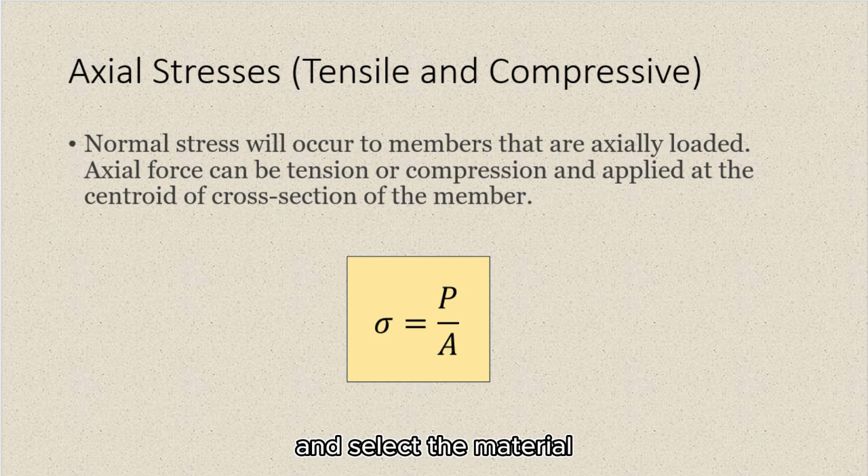You must investigate the manner in which these internal forces are distributed within the body. Only after these computations have been made can the design engineer select the proper dimensions for a member and select the material from which it should be fabricated. This is important in construction.

Up to this point, we have been concerned only with the resultant of the internal force system. However, in design, the manner in which the internal forces are distributed is equally important. This consideration leads us to introduce the force intensity at a point, called stress, which plays a central role in the design of load-bearing members.

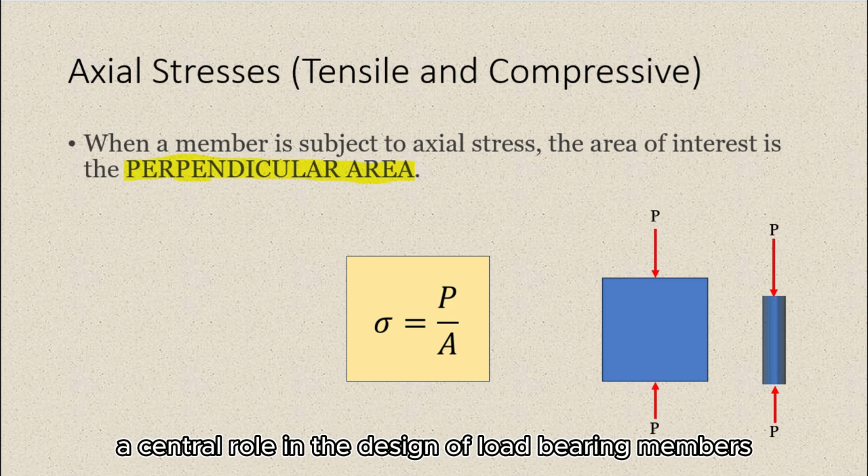In our previous subject, statics, we were able to perform the first step in the analysis of a given structure. But the values we obtain do not necessarily tell us whether the given load can be safely supported, considering the material or the type of connection.

The strength of a certain member depends upon the value found of the internal force, the cross-sectional area of the body, and the type of material of which the body is made. As such, the internal force represents the resultant of elementary forces distributed over the entire area, and the average intensity of these distributed forces is equal to the force per unit area.

Whether or not the members will break under a given loading clearly depends upon the ability of a material to withstand the corresponding value of the intensity of the distributed internal forces. Again, relating this to our formula, it depends upon the force, the cross-sectional area, and the material of the body, which will give us an idea of the allowable stress.

The force per unit area, or intensity of the forces distributed over a given section, is called the stress on that section, and it is denoted by the Greek letter sigma. The stress in a member of cross-sectional area A, subjected to an axial load P, is obtained by dividing the magnitude of the force P by the cross-sectional area A.

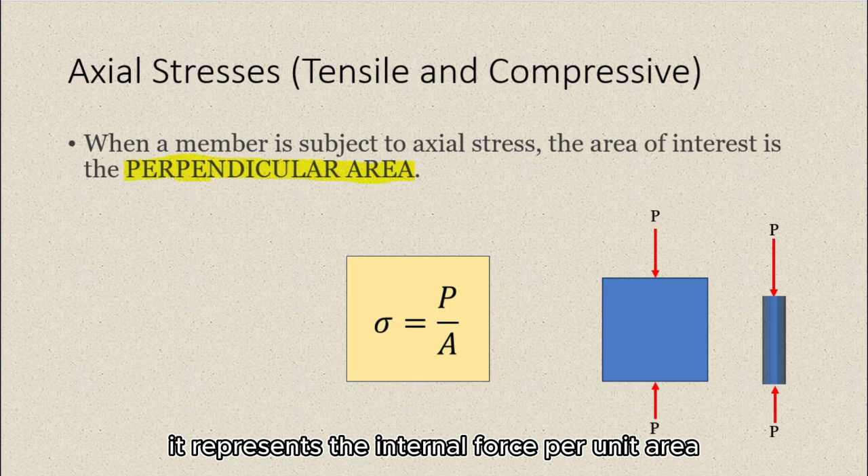This is something you always have to remember. Axial stress is a type of stress that occurs when the force is applied along the axis or length of a structural member, such as a beam, rod, or column. It represents the internal force per unit area acting on a section of the material perpendicular to the applied force.

This axial stress can be either tensile or compressive, depending on the direction of the applied force relative to the material. Recall what forces are tensile or compressive in the analysis of trusses. Tensile forces are pulling forces causing elongation, with a positive sign convention. Compressive stresses develop due to pushing forces that could cause the shortening of a member, with a negative sign convention.

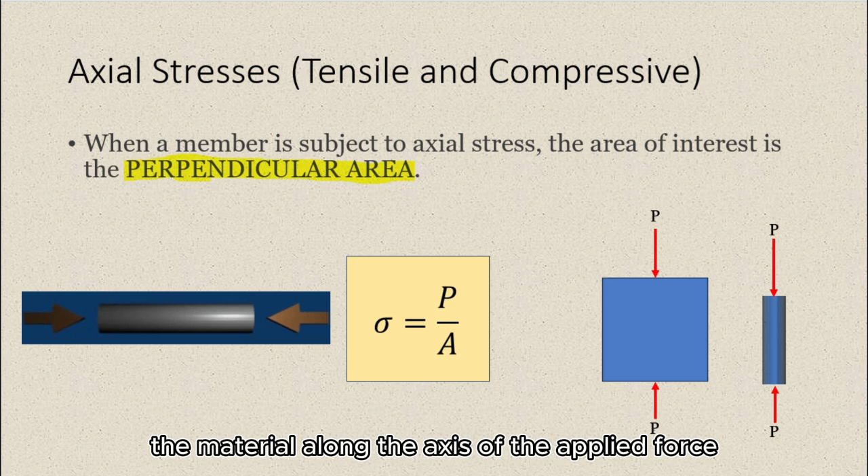This is because it tends to decrease the length of the material along the axis of the applied force. Let me reiterate, the area of interest for both of these stresses is the perpendicular area.

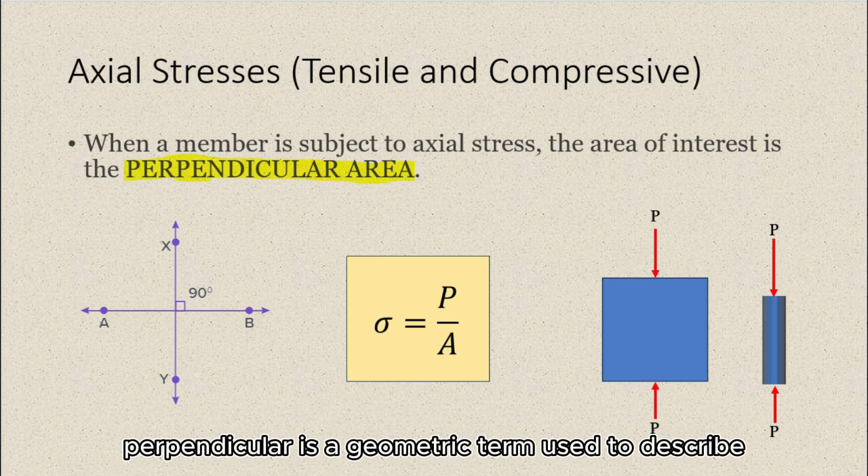Let's consider the two objects shown at the right, subjected to a force P. And then let's recall the definition of the word perpendicular. Perpendicular is a geometric term used to describe the relationship between two lines, planes, or surfaces that meet or intersect at a right angle, which is 90 degrees.

If you look at our force P, notice that it is perpendicular to this line, because we can form a 90-degree angle at their intersection. So, what this means is our perpendicular area will be these areas.

However, at first glance, we may not be able to make sense of the area that we will consider, as it is sometimes difficult to interpret the area when we are viewing the bodies on a two-dimensional plane, or 2D. But notice that the area we are considering here is the cross-sectional area.

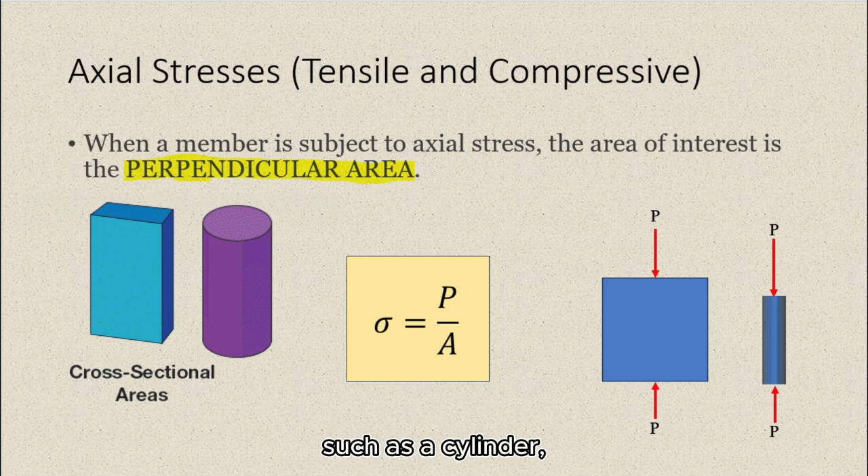The cross-sectional area refers to the area of a two-dimensional shape that results from cutting or slicing through a solid object perpendicular to its longest dimension or axis. In simpler terms, it is the area of the shape that is revealed when you make a straight cut through

an object such as a cylinder, cube, or beam at the right angle to its length. Now, if we rotate these objects, we will be able to see that area. Rotating these two, we would have this figure. For a cylindrical object, like a pipe or wire, the cross-sectional area would be a circle.

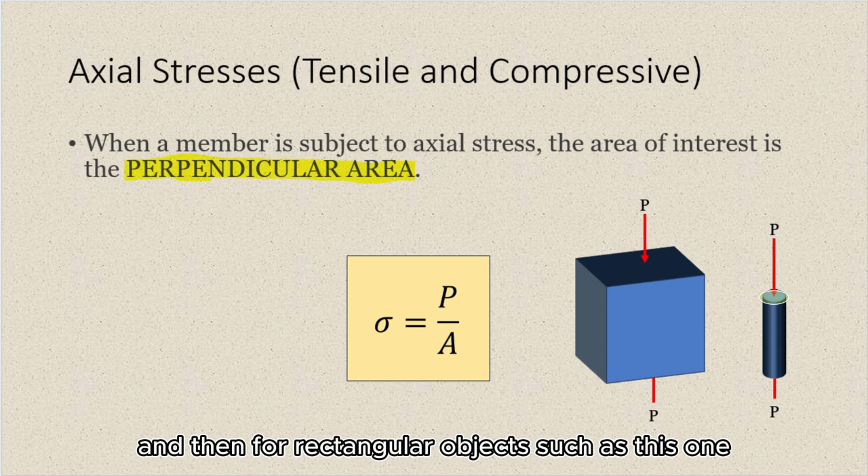And then for rectangular objects, such as this one, the cross-sectional area would be the rectangular area that you can observe that's perpendicular to the force P.

Now in some cases, our cables or rods may be inclined, but we will still consider a force perpendicular to that area, which is essentially the compressive or tensile force in the member. These forces are the resultant forces in our members, or simply the internal forces developed in our members. However, if we are to get the stress or pressure, these two terms may be interchanged.

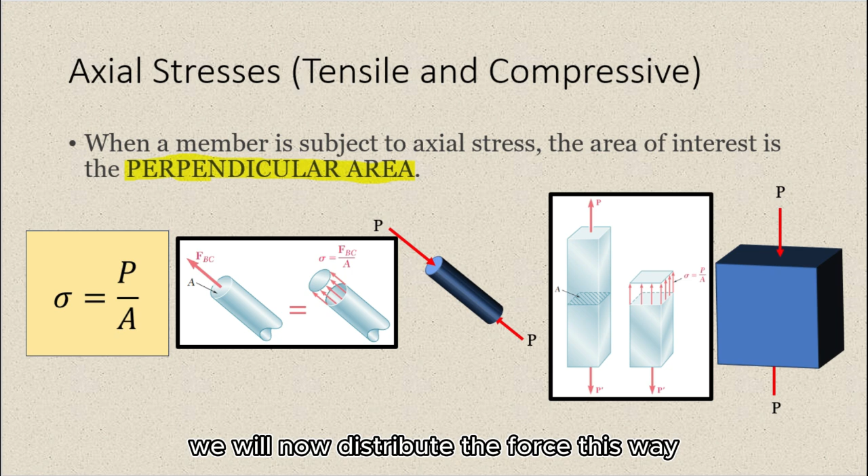We will now be distributing the resultant force P over the whole area. And so, instead of this singular force, we will now distribute the force this way. Notice that the force has been distributed throughout the cross-section.

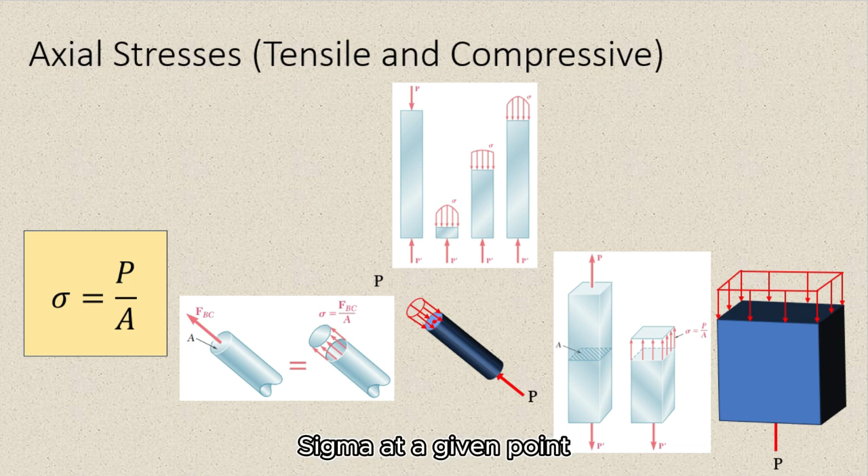In general, the value obtained for the stress sigma at a given point is different from the value of the average stress given by the formula P over A. In reality, sigma is found to vary across the section. The actual distribution of stresses in any given section is said to be statically indeterminate.

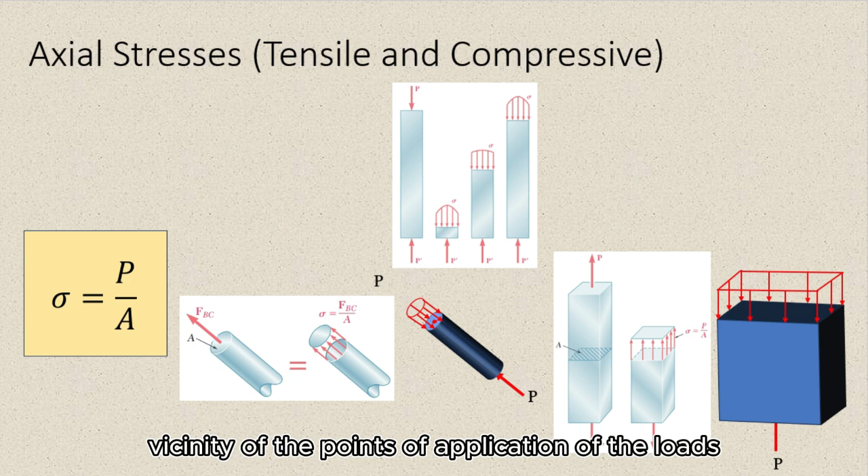However, in practice, it will be assumed that the distribution of normal stresses in an axially loaded member is uniform to simplify the calculations, except in the immediate vicinity of the points of application of the loads. So essentially, the values of the stresses are made equal to save time, and then we can obtain it from the simple formula of force divided by the area.

However, we must realize that when we assume a uniform distribution of stresses in the section, such as when we assume that the internal forces are uniformly distributed across the section, it follows from elementary statics that the resultant P of the internal forces must be applied at the centroid C of the section, which is for the rod at the center of the circle, while for the cube, it's at the center, since the figure is just symmetrical.

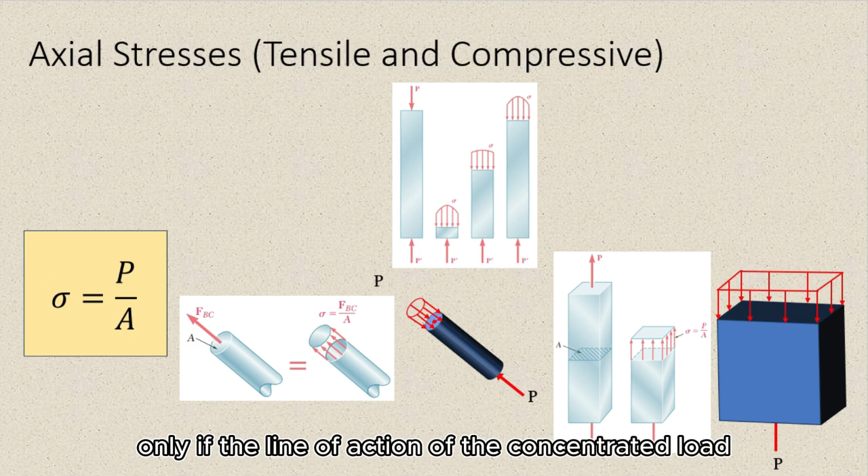This means that a uniform distribution of stress is possible only if the line of action of the concentrated load passes through the center of the section considered.

Now, since SI metric units are used in this discussion, with P expressed in newtons and A in square meters, the stress sigma will be expressed in Newton per meter squared. This unit is called a Pascal.

Now let's write that here. 1 Pascal is equivalent to Newton per meter squared. And so, if we have kPa, that will just be kN per meter squared. And then if we have MPa, that will be meganewton per meter squared. And then if we have GPa, that will be giganewton per meter squared.

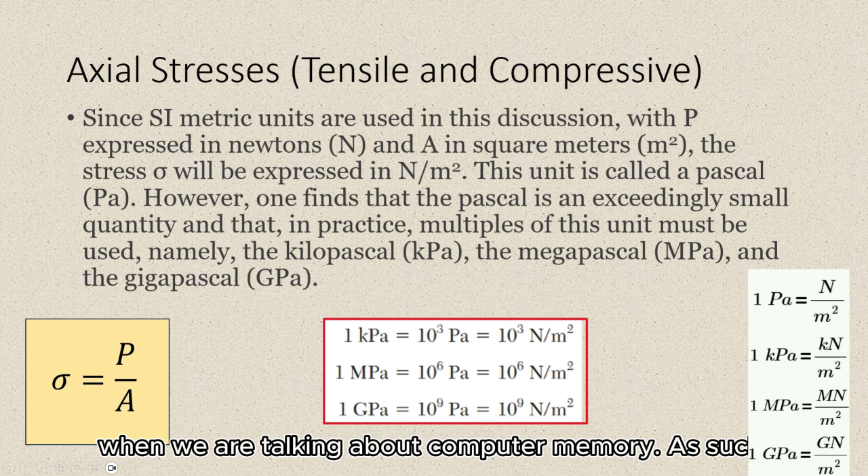So this is just like kilobytes, megabytes, and gigabytes when we are talking about computer memory. As such, 1 kPa is equal to 1000 pascals, just like 1000 bytes is equal to 1 kilobyte, and then 1 MPa is equal to 1000 kilopascals, since there are 1000 thousands in a million, and then 1 GPa is equal to 1000 MPa. This will be our conversion.

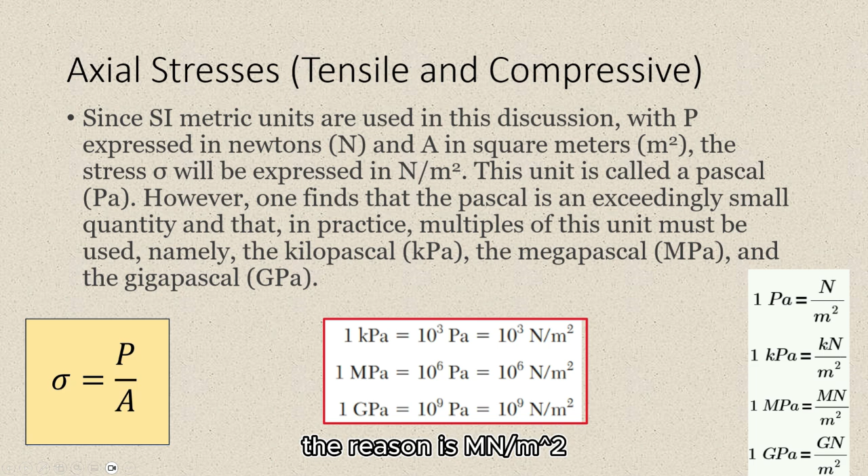Now, in our usual calculations, we will be using the MPa unit. This is because our cross-sections are usually small and have dimensions in millimeters. Now, you might wonder, MPa is meganewtons per meter squared. Why is it generally applied? The reason is meganewton per meter squared actually just means Newton per millimeter squared.

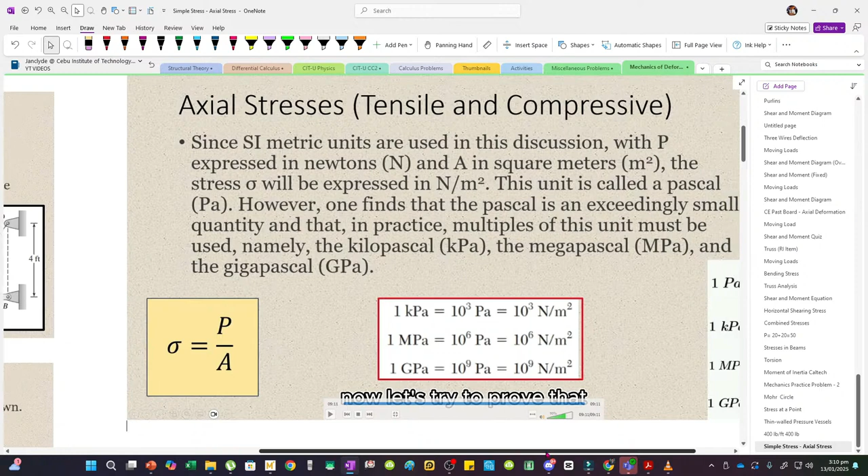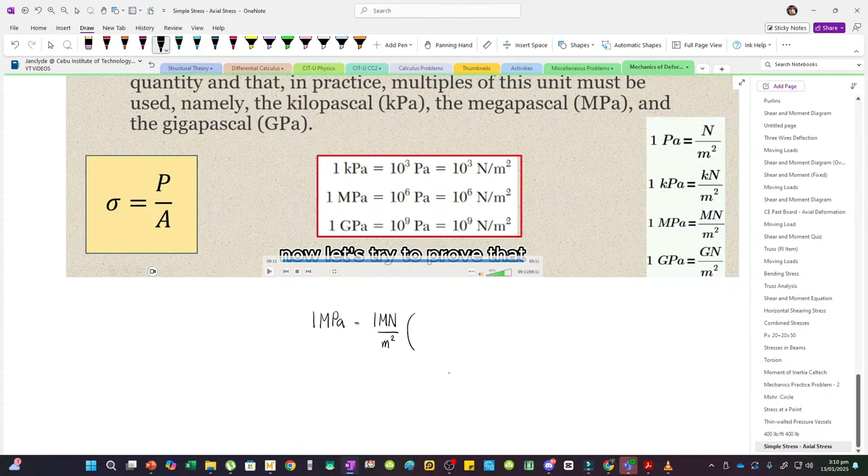Now, what if I want to convert this into Newton per millimeter squared? We can convert meganewtons. We have, for 1 meganewton, essentially, 1 meganewton is equal to 1000 kilonewtons. And then 1000 kN naman...

1 kilonewton is equal to 1000 newtons. So converting MN to newtons, we would first convert into kN. So this is like our conversion factor. We have 1 MN, and to cancel the units, we have 1000 kilonewtons. Then converting kilonewtons to newtons, we can multiply by this factor.

1000 newtons should be on top so that the kilonewtons cancel. So this is divided by 1 kN, and the kN cancels out.

And then the m squared, we can also convert that. Our conversion factor is this: for m squared, we know that 1 meter is equal to 1000 mm. But since the meter there is squared, we also need to square the conversion. So it's 1000 times 1000, that's 1000 squared, and the one at the bottom is also 1000 squared. So essentially, everything cancels out.

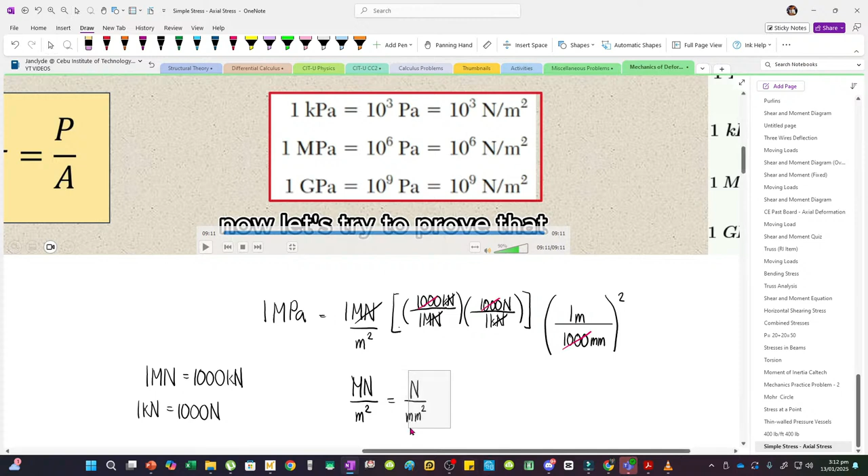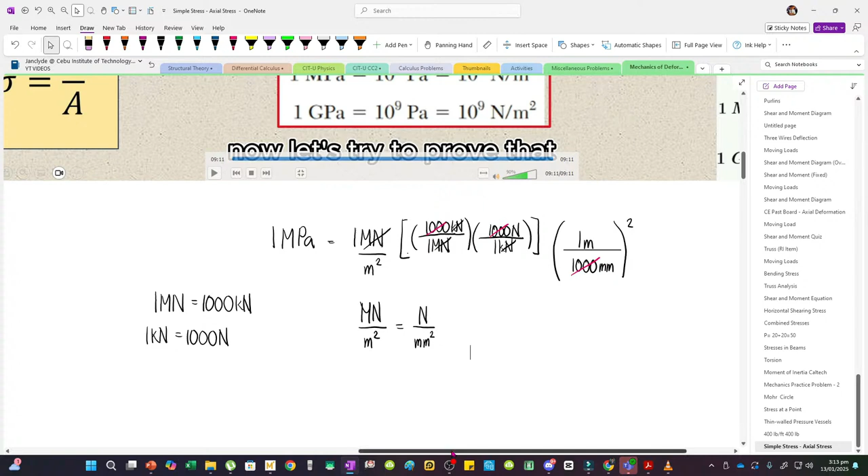So that's why usually what you see in stress values is in MPa. It just means Newton per mm squared, which is usually what's used since our sections are essentially dimensioned in millimeters. It would be too large if in meters, unless we are talking about beams or columns, or slabs too.

So this is our first question. A hollow steel tube with an inside diameter of 100 mm must carry a tensile load of 400 kilonewtons. We have two questions since I added some from the previous lecture. Our first question is to determine the outside diameter of the tube if the maximum working stress or yield stress of the material is 120 meganewton per m squared, which is just equal to Newton per mm squared based on our conversion.

Our dimensions are in mm since the inside diameter is 100 mm. So for the first question, determine the outside diameter. We know the general formula: stress equals force divided by area. So for letter A, stress is 120, which is the maximum working stress or yield stress.

So for letter A, that's 120 Newton per mm squared. Let's just convert the units, and that equals force divided by area. Now this is our force. The perpendicular area is this hollow portion, like a hollow section, so we have to use that area for P over A. Now our P is 400 kilonewtons, the axial force applied, which is essentially a tensile force since it's a pulling force.

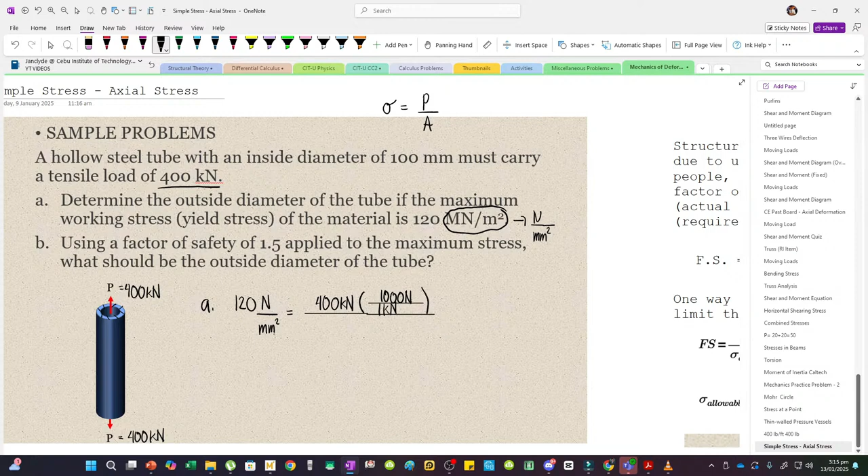We have 400 kilonewtons. But all our units need to be consistent. Since it's in Newton per mm squared, the unit of force must be in newtons, and the dimensional unit for distance must be in mm. So the 400 kilonewtons needs to be converted into newtons. Again, 1 kN is equal to 1000 newtons. Whatever you want to cancel, you put in the denominator, so the kilonewtons cancel out and what's left is newtons.

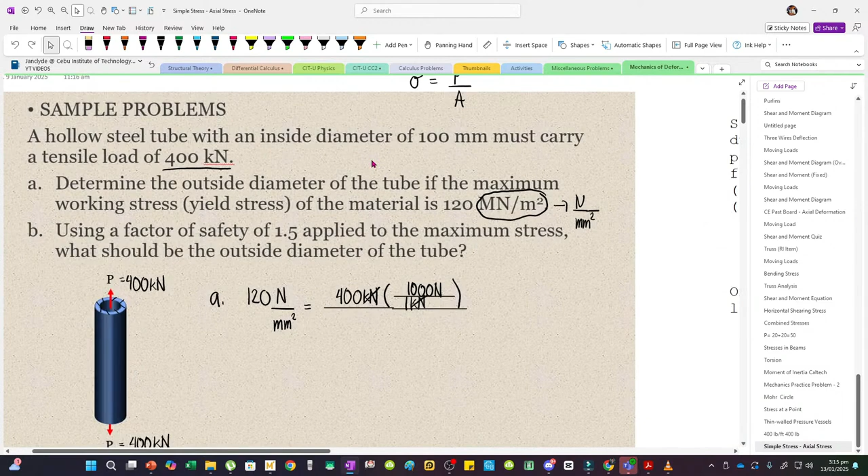And then for the area, we have a hollow section. The inside diameter is 100 mm, this dimension right here. Now the area of that hollow section can be taken by taking the area of the outside circle minus the inside circle. So the area of the outside circle, that's pi d squared divided by 4 in terms of the diameter.

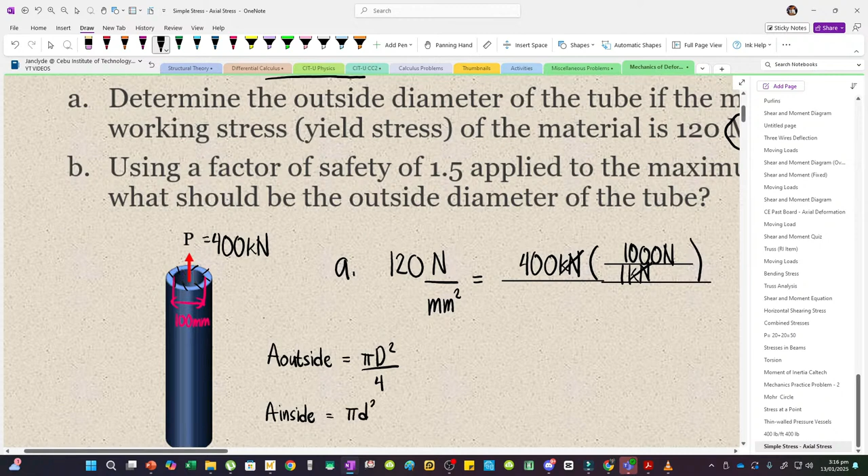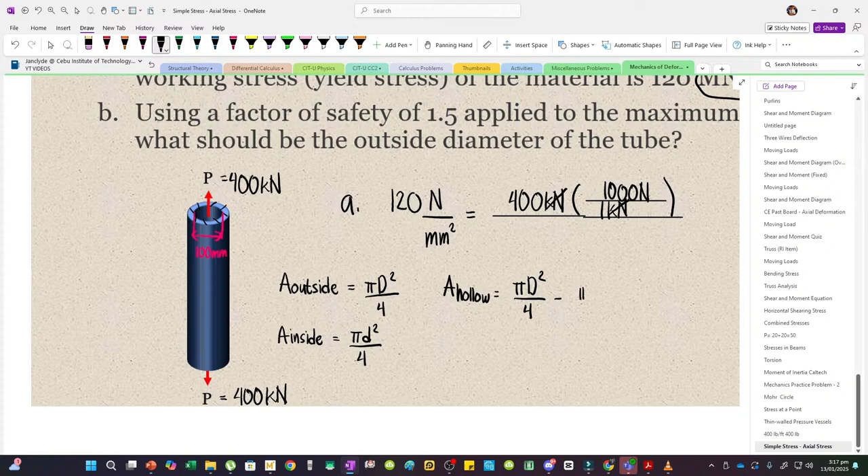Since it's the outside diameter, we use capital D. And then the area inside, this inside circle, is equal to pi times d squared divided by 4, small letter d for the inside diameter. So the area of the hollow section would be the area of the outside circle, pi D squared divided by 4, minus... what is d? It's given, d is equal to 100 mm for the inside diameter.

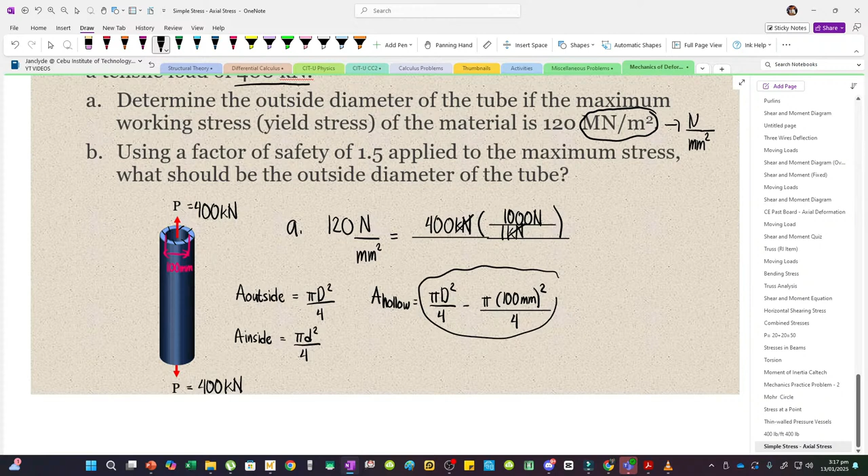So pi times 100 mm, squared, divided by 4. This is the area we'll place in force over area, so let me copy this down. We divide by this amount. So solving for D, it's a bit hard to simplify, but to solve many problems, I will just use my emulator. But you can simplify it on your own terms.

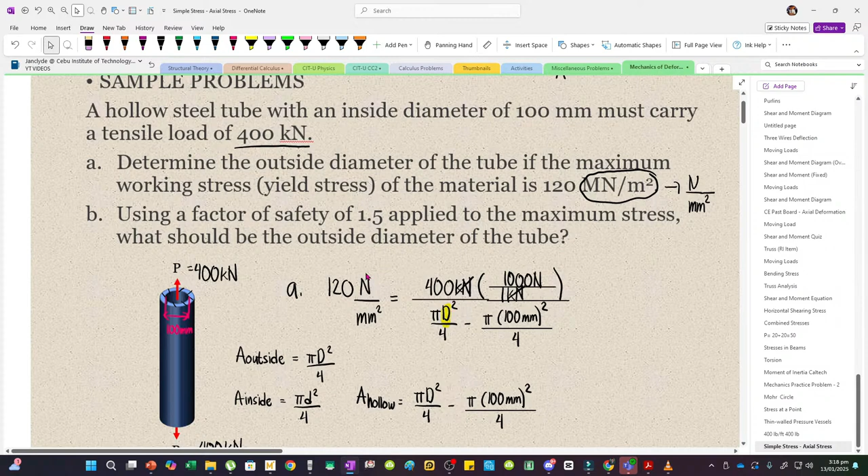So equate ko na lang yan. Notice na matagal mag-solve yung calculator kapag yung unknown is nasa denominator. Diba, nasa denominator yan. So yung pwede mong gawin is you can just multiply this term sa kabilang side. So essentially, yung ita-type mo sa calculator is 120 multiplied by this denominator.

So we have pi times unknown yung diameter natin, so lagyan mo ng x, divided by 4, minus pi times 100 squared, divided by 4. Ayan. And then equate natin to 400 multiplied by 1000.

Mas mabilis yung processing ng calculator kapag lahat ng unknowns mo nasa numerator lang. So kaya multiply natin siya sa kabila. Shift solve na lang tayo. Press equals, we would have 119.35.

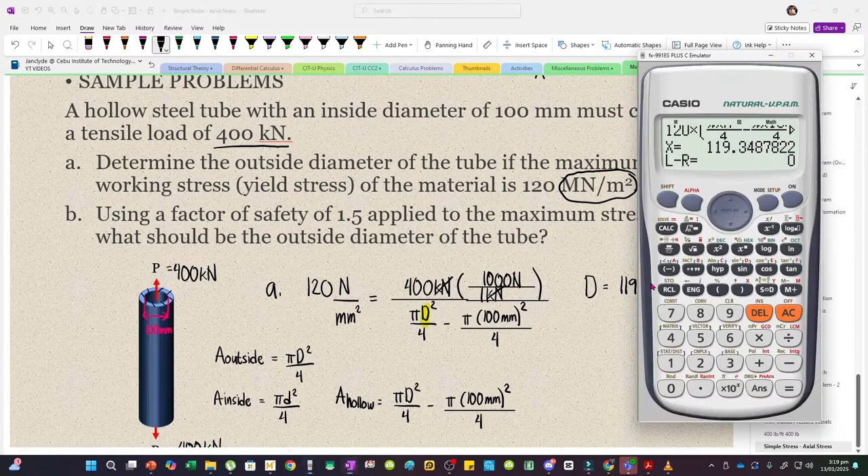So ito yung inside diameter. I mean, yung outside diameter pala. Yan pala yung hinahanap. So 119... ano yan? 348 or 35 mm.

Wala namang steel sections na ito talaga yung exact na outside diameter. So usually, ginagawa natin tong 120 mm. Say 120 mm yung minimum diameter. Now sir, bakit 200? Bakit hindi 119?

Diba, 0.35, pag na-round off tayo, essentially, ginagawa natin 119 lang. Pero hindi yan pwede sa stress condition natin, kasi yung 119, this is for exactly 120. 119.35, kapag liliit yung diameter natin, mai-exceed na niya yung allowable stress, yung yield stress pala. Therefore, we have to choose a diameter na mas malaki kesa sa na-solve natin.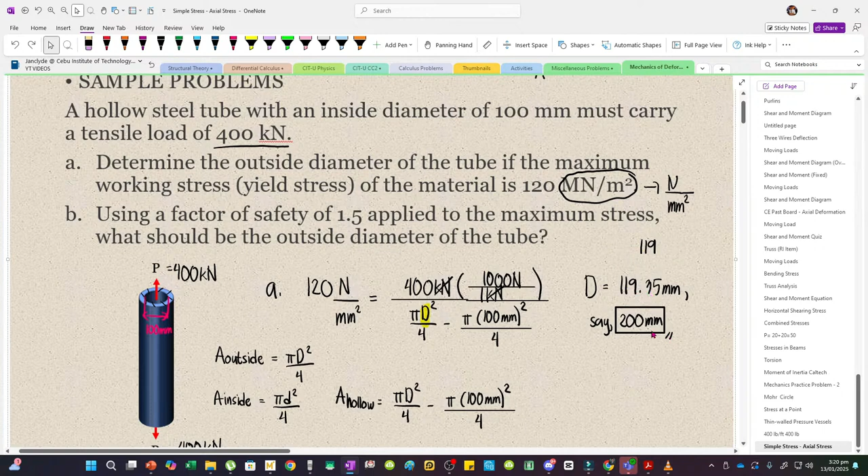So, you can use 200, 201, or any other value greater than 119.35. But hindi ka pwedeng gumamit ng diameter na lesser than this value. So kaya, gawin mo na lang 200.

Now, ano naman kapag merong factor of safety? Ito yung dapat natin gawin. Diba, structures must support or transmit load, but due to uncertainties such as wind, snow, people, etc., ito yung mga uncertain loads na parang madadagdag sa structure natin. So, it is necessary to implement a factor of safety to ensure na yung capacity is greater than the load.

So, yung formula natin for factor of safety, this is the actual strength divided by the required strength. One way to design for failure is to limit the stress on the structure. So, Fs is equal to the maximum stress or the yield stress divided by the stress allowable.

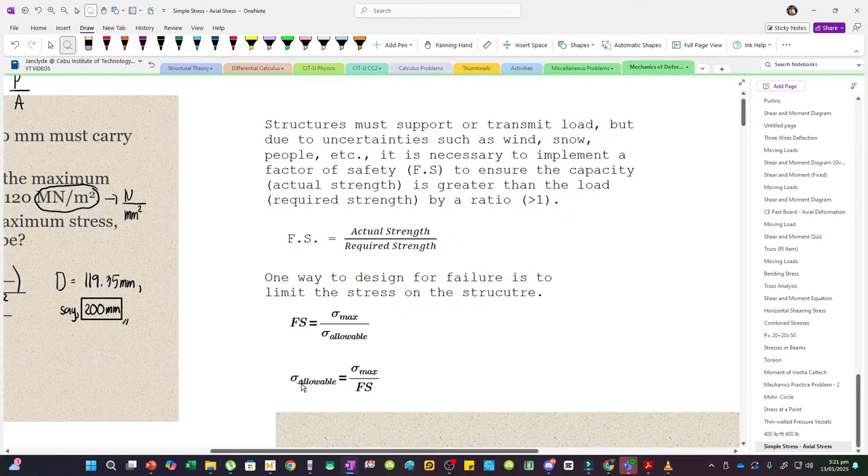So in terms of the stress allowable, pwede natin siyang i-multiply sa kabilang side, and then yung Fs, i-divide natin sa yield stress. So what we are doing here is essentially, yung stress allowable, mas maliit yan kesa sa maximum stress or yield stress. So yung reason dyan is the factor of safety must be greater than 1.

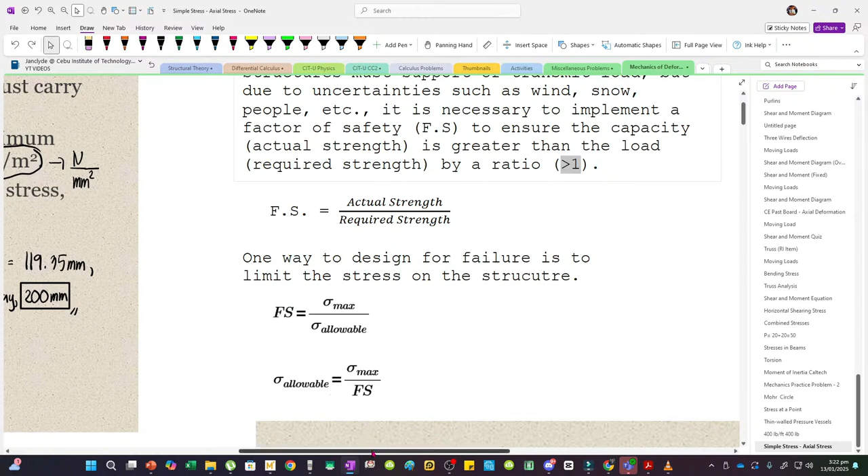Kasi di ba nasa denominator yan, it must be greater than 1 para mas liliit yung allowable. Mas ginagawa kasi natin conservative kapag merong factor of safety. So essentially, kapag in-apply natin yung factor of safety, yung makikita nyo dito is mas lalaki yung outside diameter na masosolve natin compared to letter A na wala tayong factor of safety na ginamit.

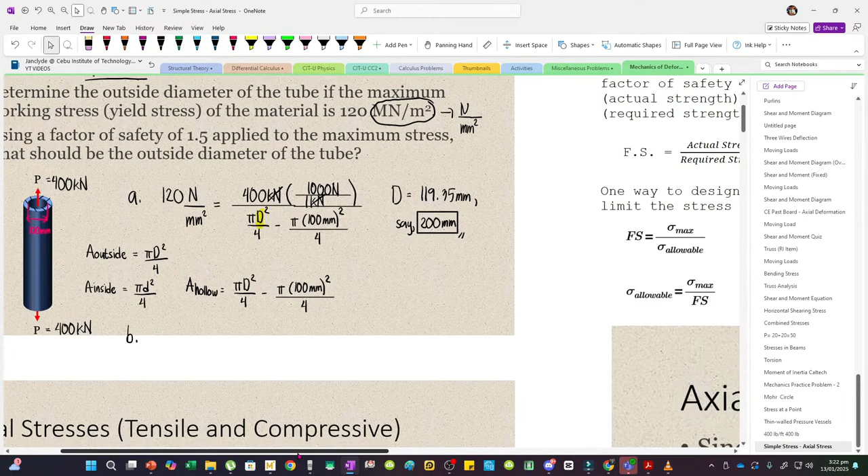So ito yung mangyayari sa letter B. For letter B, ayan, we can divide this stress, or essentially kapag gagamitin mo yung formula, yung maximum stress natin, maximum working stress is 120 MPa.

So parang stress allowable is equal to 120 MPa divided by the factor of safety. So factor of safety 1.5, mas liliit na yung allowable stress natin. So ano yung 120 divided by 1.5? Diba 80 na lang. Instead of 120, gagamitin natin para sa stress na yan yung 80 na.

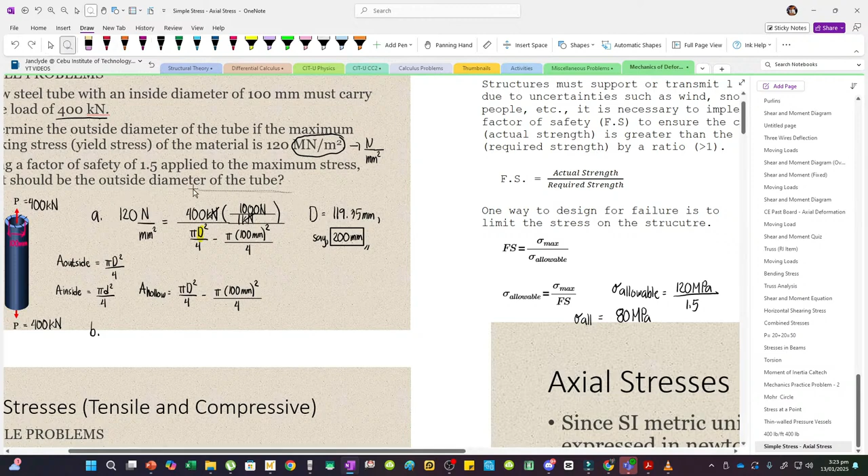So mas pinaliitan natin para mas conservative yung design. So this is 80 MPa, stress allowable. Ayan, so instead of 120, parang yan lang yung magbabago. So copy ko na lang. Ayan, and then ito gagawin natin 80.

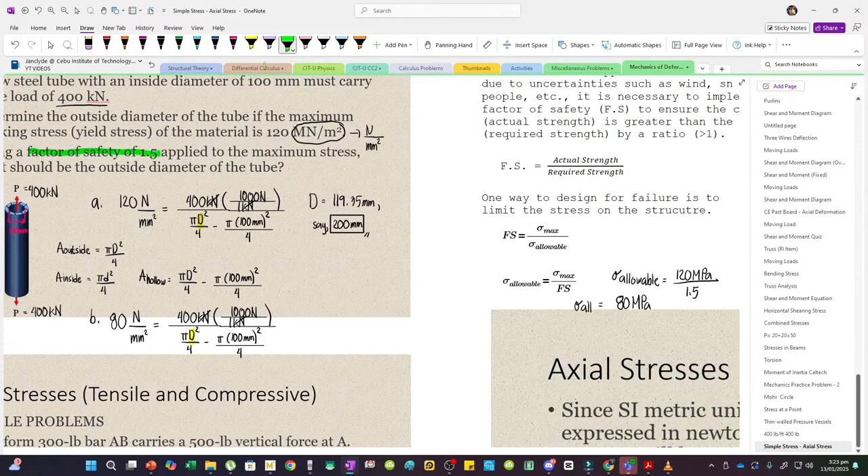Again, naging 80 yan dahil sa factor of safety na 1.5. In-apply natin sa maximum working stress. So dito na lang 80. Nako, na-erase ko na.

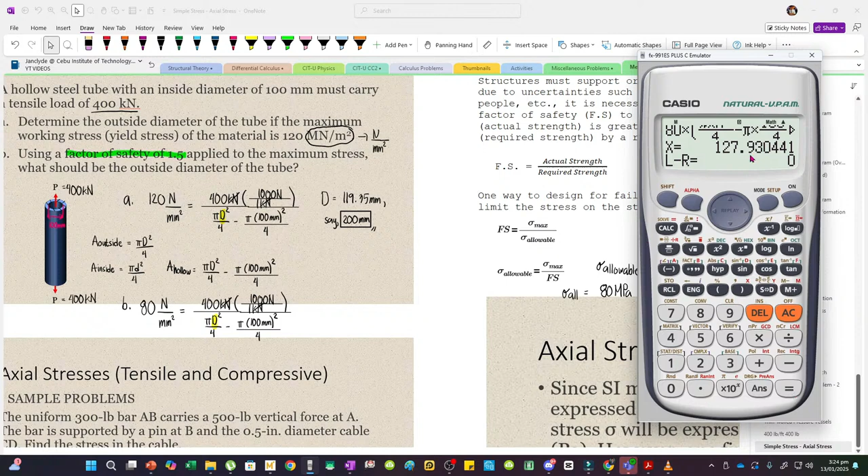Retype na lang natin. So solving the outside diameter, dapat mas lalaki siya kesa sa 119. So press equals, we have 127.93, and then our unit is mm. So sabihin natin 128 mm.

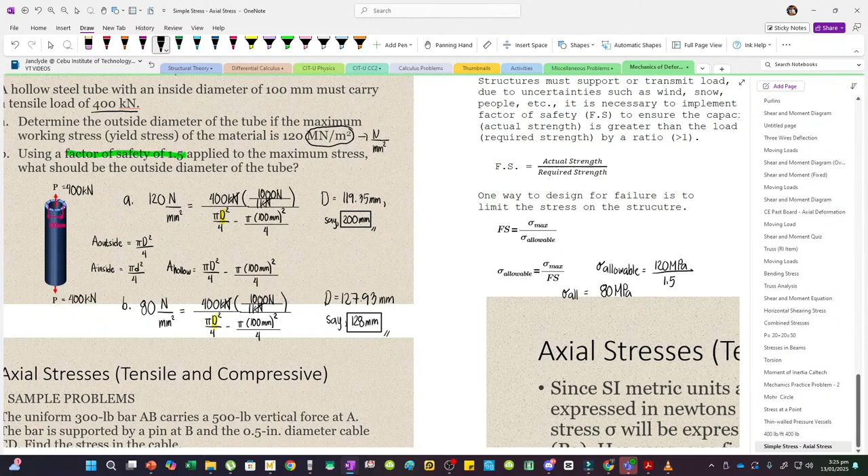Kailangan talaga mas malaki yung gamitin mo. So ito yung minimum. Notice na mas malaki siya kesa sa previous na nakuha natin. For a while, bakit naging 200 yan?

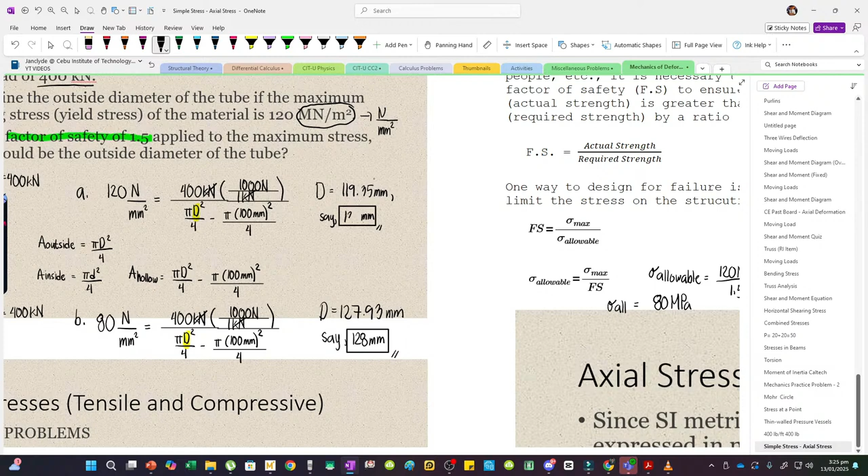120 pala to, sorry. 120 mm. 119, gagawin natin 120. So yung 128, mas malaki kesa sa 120. Kasi meron tayong factor of safety na in-apply. Mas nagiging conservative yung design. So makikita nyo naman, this is safer than this outside diameter.

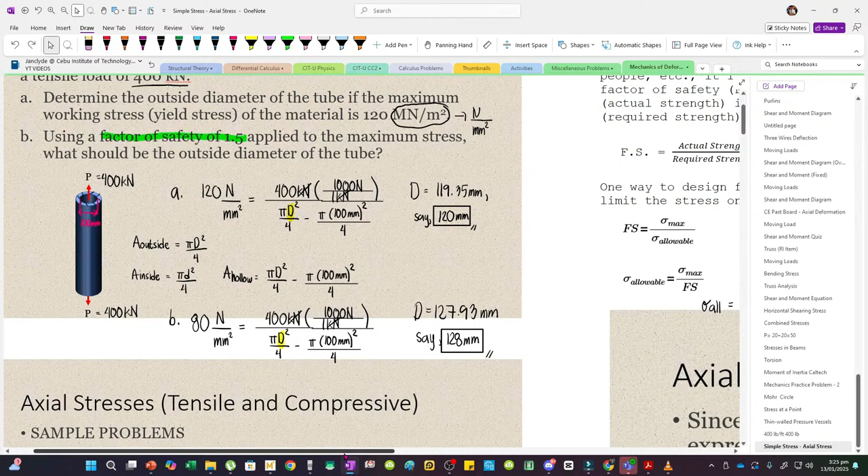Yan, paki-correct na lang, 120 yan. Ewan ko bakit naging 200. Lutang movements, men.